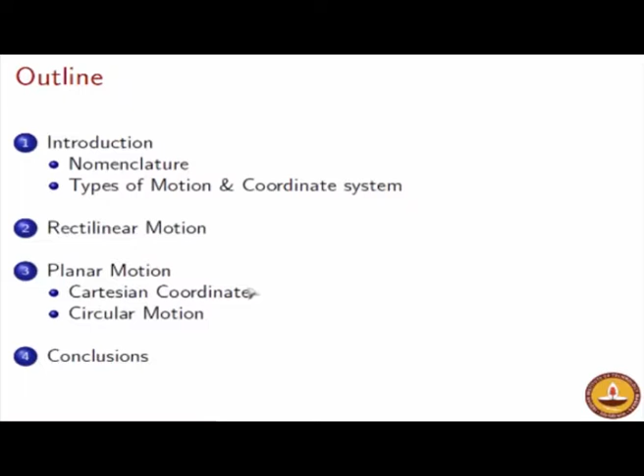are as follows. Today, we are mainly going to deal with this part of the course, which is clarifying a few words that we keep hearing in this subject. We're going to discuss mainly the nomenclature and set ourselves up by the discussion of different types of motion that we are going to analyze, and a very crucial aspect would be the different coordinate systems that will be used in the analysis. So let's go forward. These things will be covered in due course. Let's not waste much of today's time on it.

Fine. So here's an invitation to dynamics. Dynamics is a very foundational level subject. It is something which is all pervasive. It is ubiquitous. So there is hardly any application where you don't see the use of dynamics. Dynamics is there all around. So it's good if we could study this subject of dynamics with some effort in our foundational years, so that later in the applications we should not have any problem in dealing with this subject.

And the best thing about dynamics, unlike some other subjects, is that there are only very few rules to remember, and the purpose of this talk is probably to emphasize these very few simple rules. And the way I have been taught dynamics and the way I teach dynamics to my students is that we should not worry too much about the formula. The formula will come by itself, and also maybe in stark contrast to what some of you think, the way I think about this subject, it is not really a big deal to solve different problems by plugging values into a memorized formula. What is most important is understanding the rules of the game, understanding the concept, and then applying it to every situation.

I would rather discourage you to practice too many problems from routine books which are just going to use some formulas and how to use some formulas in particular problems. That is something which at least for me I think is not a very good idea. So going ahead, let's start with the course proper. So as we said, the topic that I am going to cover in this set of 5-hour lectures is particle kinematics. So I begin with the following description: what do these two words, namely particle and kinematics, mean? So I will spend some time in uncovering these ideas to you.

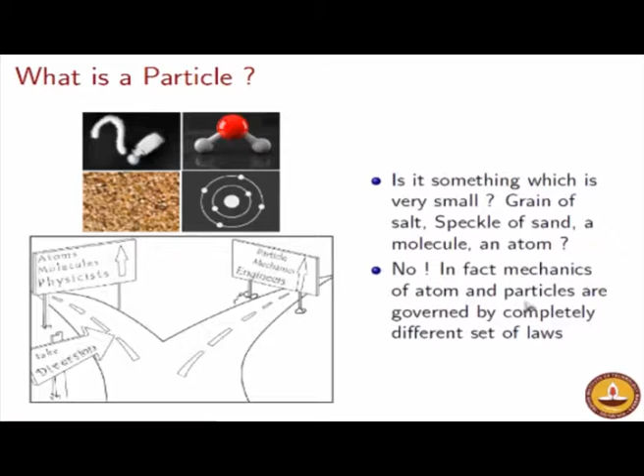So as I said, in engineering mechanics, what atoms and particles are governed by is not what we are looking forward to. In fact, atoms and molecules in general will be governed by a completely different set of rules which is beyond the ambit of engineering mechanics. In engineering mechanics, atoms and molecules are not the concern, but what we exactly mean by particles in the engineering context I will come to in the next slide.

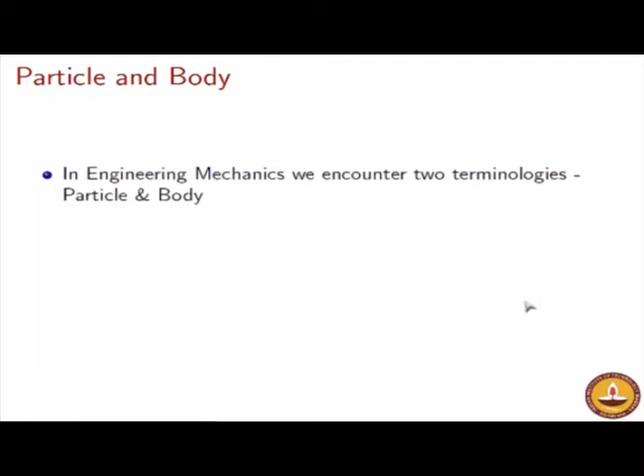So as we said, in engineering mechanics, that is the one which we are interested in, we encounter two terminologies, namely particle and body, and we are going to talk about particle mechanics at this point. So to define a particle or to characterize a particle, here is my simple definition of it. Particle is an object such that all points in the object have identical motion characteristics.

Let me illustrate what I mean. Let us take this object for example. This object, if it moves in this fashion, right, you could see my hand waving. So if this object is moving in this nice fashion, then all the points in this object, whether this one or that one, all the particles have identical motion characteristics.

Now that word motion characteristics is given in bold. What that means is that it has identical velocity at every point, it has identical acceleration at every point, it has identical displacement at every point in time. So this is a crucial distinguishing characteristic of what we call particle in engineering.

I will give you better examples downstream in my slides, but at this point I wish that you take a note of this very important definition of what is a particle as opposed to what is a body. Again, these two words refer to the very engineering context of their usage. So as I said, the motion characteristics, that word in bold that I have stressed, actually means the displacement, velocity and acceleration at each instant of time.

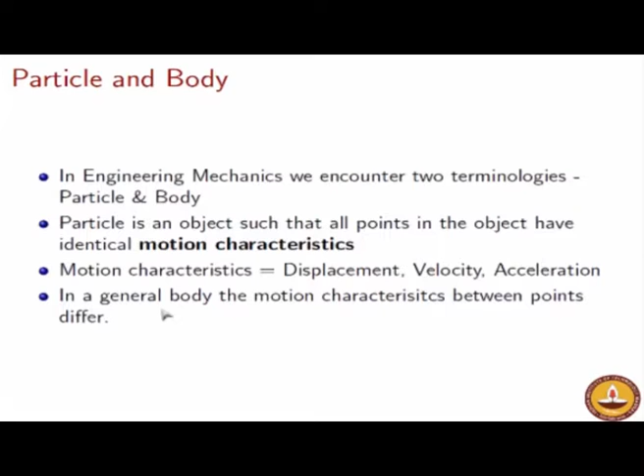So if the aeroplane is in fact flying in a nice smooth fashion without encountering any turbulence and the ride is very smooth, the crucial aspect is every point of the aeroplane, whether it is a living thing or a non-living thing like some point in the wing, some point in the tail, every point will have identical velocity. If the aeroplane accelerates, every point will have identical acceleration.

This will not be true if the aeroplane starts rolling in this fashion when it encounters turbulence and whatnot, or if it is maneuvering like a military aircraft, doing some strange sorts of maneuver, then it is not true that all points have the same velocity. But here we are talking about this flight vehicle going in a straight path, going in a path of ascent.

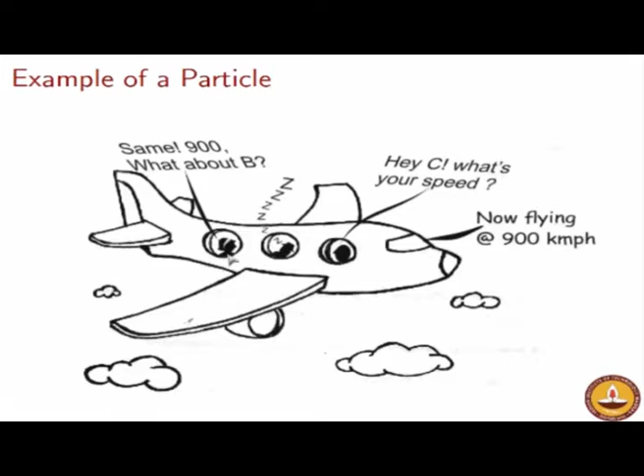And because we are interested in solving for the motion characteristics of any point, we call this a particle mechanics or a particle kinematics problem, where there is a single point which is of our interest. So just to recapitulate what we talked about in the previous slide, all points in the aeroplane, whether living or non-living, will have identical motion characteristics.

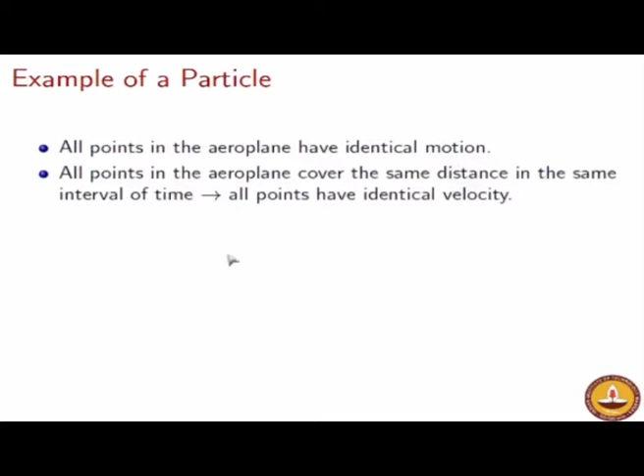That means that in the same interval of time, that is from takeoff to any other arbitrary point in time, all points will have identical velocity. During takeoff, the passengers, irrespective of where they are seated, will be experiencing the same kind of inertia forces. Again, that implies all points have identical acceleration.

This is true if the passengers remain seated, and if they start dancing around in the plane like most crazy people do, then this is not true. But we are talking about the ideal case where all the passengers are nicely seated, and the aeroplane is moving in a nice smooth fashion without any crazy maneuvers or turbulence as such.

So the last point is what allows us to idealize the motion of the aeroplane as that of a particle. So for determining the motion characteristics of the aeroplane, the study of the motion characteristics of any one point of this aeroplane is sufficient, the reason being that every point of the aeroplane shares the same motion characteristics. So whether you are interested in point A or point B, it does not matter.

So therefore, we will idealize this aeroplane to be a single point, and hence call this problem a problem of particle kinematics rather than rigid body kinematics. So to give you a counter example, let us first look at an animation. I hope you are able to see the animation.

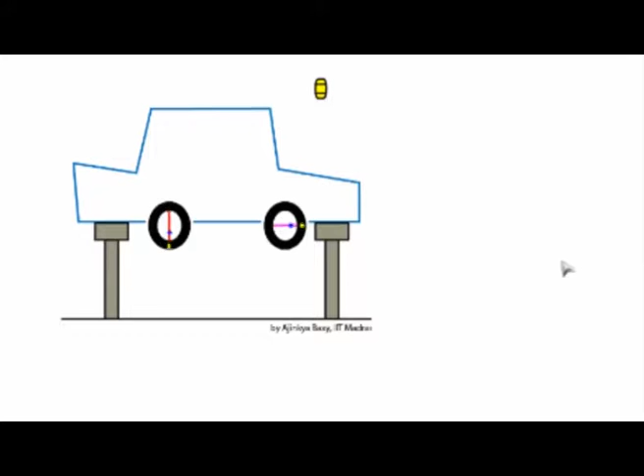Each point on this tire has a different direction of its tangent, and therefore the velocity at each point is very different. The velocity at each point has a different direction, even if the magnitude remains the same. So this is again in sharp contrast. We were able to see it whether you look in terms of magnitude or in terms of direction.

But in this case of a wheel which is simply spinning about its axis without moving, each point of this wheel has completely different velocity characteristics. Maybe I can draw. So what I intend to tell you is the following. So let us say this is the wheel

and this is the center of the wheel, and let us consider 2 points, one a circle and the other a diamond. At this instant of time, the circular point has velocity directed along this tangent, and at the same instant the diamond point has velocity directed along its tangent. So if I call this point A and this point B, VA is not equal to VB, because as I see from the drawing, the directions are definitely different.

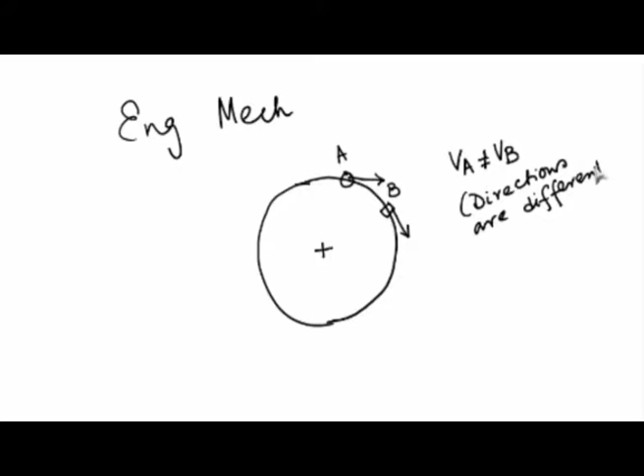So that is why this case is not conforming to particle kinematics. This body cannot be approximated as that of a particle, because we have understood that particle idealization can be made only for those kinds of objects where every point shares the same motion characteristics. And we have brought out to you 2 examples.

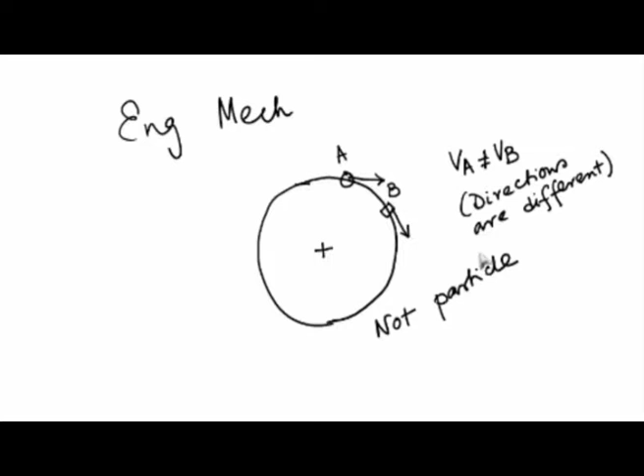One, the case of an aeroplane which is flying on a straight path. This corresponds to a particle because every point of the aeroplane shares the same motion characteristics, whereas in a spinning wheel, each point will have different motion characteristics and therefore it is not a particle. So please try to understand both the example as well as the counterexample. So I'll just run through what I have explained.

So consider the wheels of an automobile. When the car is taken for a wash, the wheels will rotate freely without touching the ground, as you would have seen in the animation. So during this free rotation of the car wheels, all points on the same radial distance will have the same magnitude of velocity, but the velocity will be directed in the tangential direction, and since at each point the tangential direction will be different, each point will have a different velocity, and therefore this is not the case of a particle.

So the wheel is not a particle, as we have mentioned. Okay, so this is a counterexample. To complicate things a little further, it is not just the wheel freely rotating while tied onto the car, and the car is not shown in the animation that you are seeing. This wheel is basically rolling without slipping on a frictional surface.

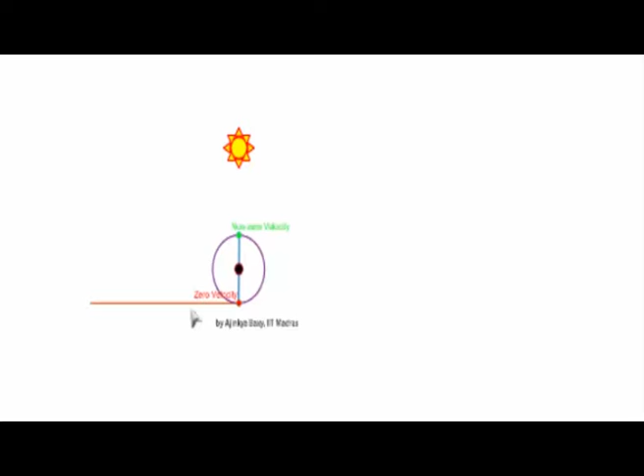What does that mean? That means, this is the wheel for you, and when this wheel is rotating, you will see that the point of contact between the wheel and the ground is always subjected to a condition which is called the zero velocity condition. That makes sense because when you say that there is adequate friction between the wheel and the ground, then the point of contact should not slip. Relative motion between the wheel and the ground is completely prevented because of the heavy friction between the wheel and the ground.

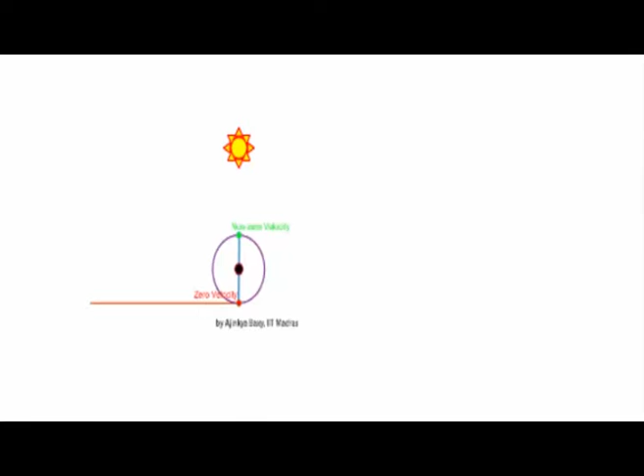So at any instant of time, this red point will have a zero velocity, whereas all other points will have a non-zero velocity. In fact, by further analysis you can show that the velocities will again be along the tangent to this circle, but the direction of the tangent is again different. So here you will find that the velocity is again different for different points on the wheel. So this time we can say that not only the direction but also the magnitude of velocity of all these different points on the rim of the wheel is going to be different.

So we have to conclude that this rolling without slipping of a wheel again constitutes an example wherein not all the points on the wheel have identical motion characteristics. Different points in the wheel have different motion characteristics at each instant of time. So therefore, though the wheel is much smaller, the aeroplane can be idealized as a particle, whereas the wheel cannot be idealized as a particle.

So the crucial takeaway: please don't have a feeling that a particle is an idealistic assumption that never occurs in reality. It is not so. It is just the way that you wish to analyze the kinematics of a given system. A very large object can be idealized as a particle, whereas even a small object may not admit the particle idealization. So the particle idealization actually has nothing to do with the size of the object. It has to do with the type of motion that you wish to analyze.

If you are indeed sure that your aeroplane or your car is traveling on a straight path, there is no reason to think that it is not a particle. Similarly, even a small wheel, if it is just moving in a translatory fashion, is a particle. But if the wheel is actually rolling without slipping on a surface, or even if it is freely rotating, then it is not a particle.

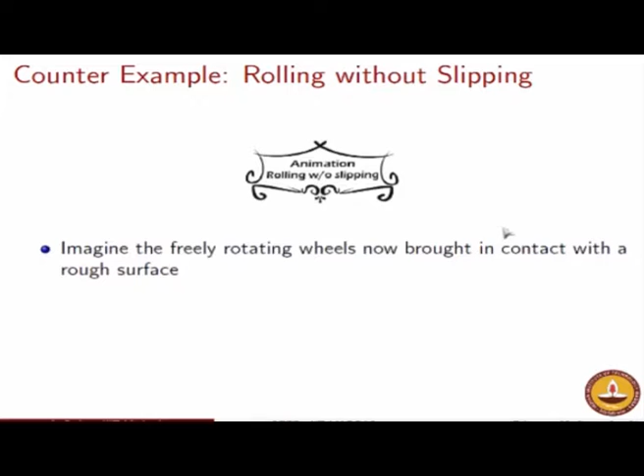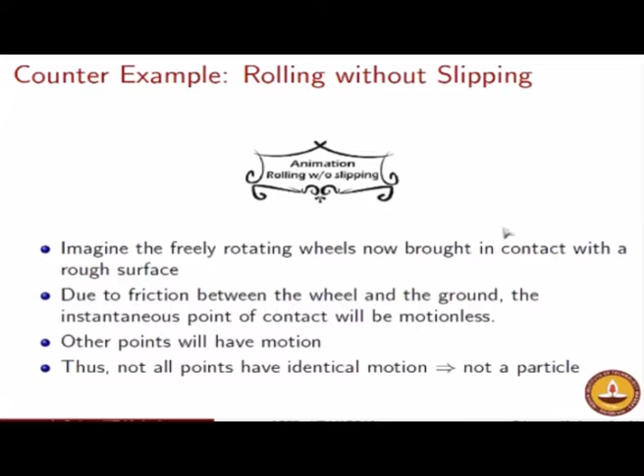So this distinction I think is very important, because you must understand when to apply the rules of particle kinematics and particle dynamics to a given problem, and when not to apply them to the problem at hand. So with this in mind, let us go forward. So as I said, these additional points are just what we have talked about in the last few minutes.

Now coming back to this motion of a rigid body. You will keep hearing in the course of your engineering curriculum the usage of these two words, rigid body and deformable body. It is very crucial to understand the distinction between these two terminologies. A rigid body is a sort of idealization, but let us try to understand how a rigid body differs from a deformable body.

If the distance between any pair of points remains unchanged during the course of motion of the body, then the body is said to be rigid. To give you an example, I draw 2 points on this rigid body, one here and one here. As this body is moving, I don't think you will dispute with me that the distance between these 2 points is not changing. So I can idealize the motion of this body.

If I extend this argument to an aeroplane, the distance between 2 points marked on an aeroplane is not going to change as the aeroplane is flying. The distance between 2 points drawn on the body of your car is not going to change because of the motion of your car. So in all these cases we call this a rigid body. A rigid body is a body wherein the distance between any pair of points remains constant and does not change during the course of your analysis.

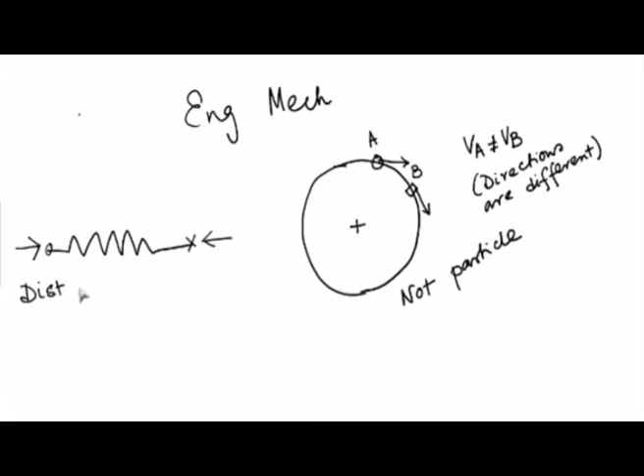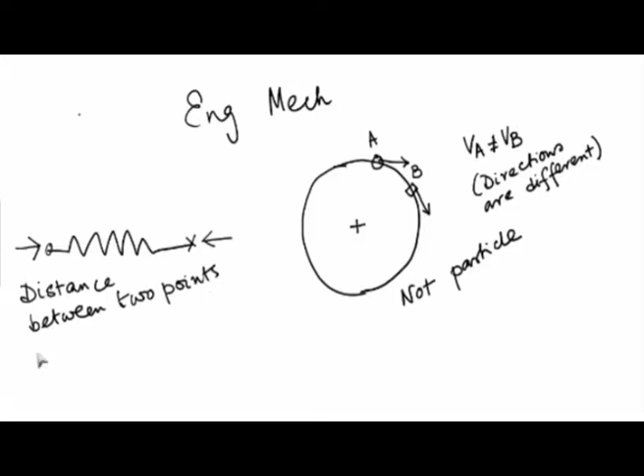This is in contrast to a deformable body, where the distance actually changes. If you have a spring-like object, I can draw a spring for you. So let us say this is a spring. Under the application of forces, the distance between these 2 points will obviously change. So the distance between 2 points in a spring changes due to application of forces.

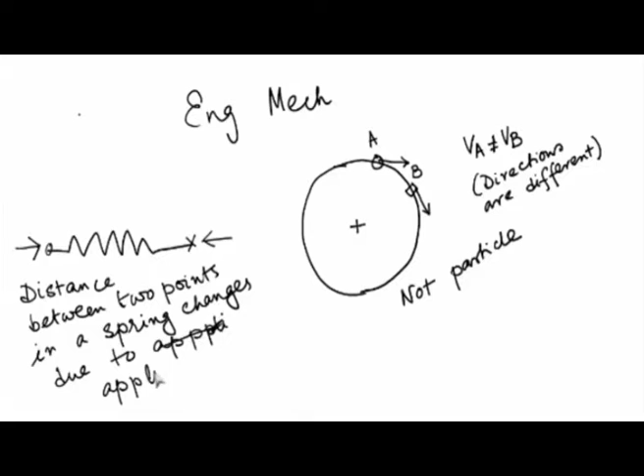Similarly, if you consider an elastic bar, as you will see in your lab experiments in solid mechanics, once you apply equal and opposite forces on this elastic bar, it will be deformed, which means the distance between any pair of points is not going to remain the same, and that is when we call this bar elastic. There will be situations where the distance between 2 points in the body you are analyzing is not going to remain fixed, and that will be the case of an elastic body, whereas where the distance is fixed it is a rigid body.

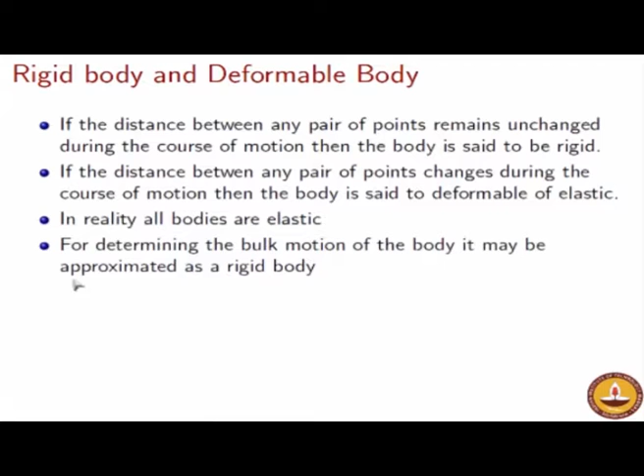Going ahead, in reality all bodies are elastic, as you will learn in your strength of materials. But the important part is that for determining the bulk motion characteristics of the body it may be approximated as a rigid body. As I just demonstrated, while analyzing these motion characteristics the distance between any 2 points can be assumed to remain the same, but I can apply a large amount of force on this body and actually crush it, making these 2 points come close together.

But in the cases we are going to deal with right now, we are not talking about such cases. We are only going to talk about the bulk motion characteristics of this kind, and that is what is going to be of our interest in the next few hours.

And to continue my example with wheels, a hard-pumped bicycle tire will approximate the rigid condition. If your bicycle tire is pumped hard and you press it, it is very difficult to squeeze the tire tube, which means the distance between the 2 points is very difficult to change. At the other extreme, when the air in your bicycle tire has leaked out, it is very easy to squeeze, which means under that condition the bicycle tire is becoming more and more elastic.

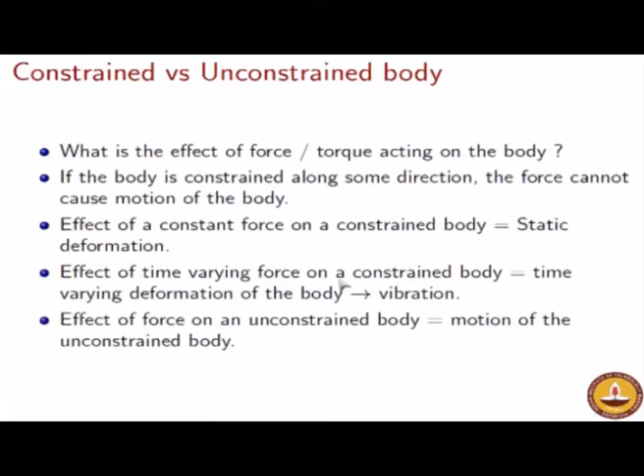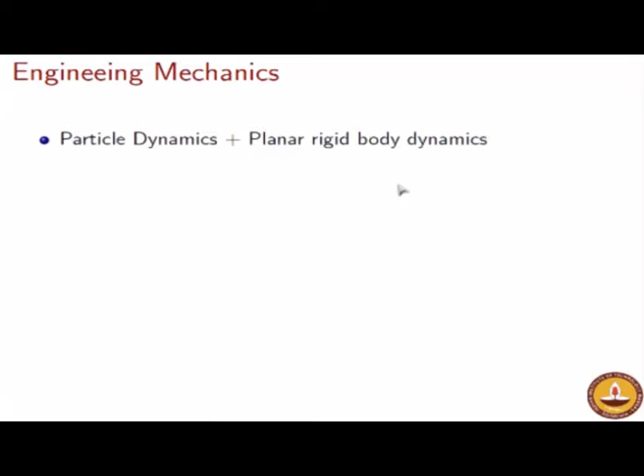So you are going to study throughout the course of a semester probably entire particle dynamics and rigid body dynamics, which is planar rigid body dynamics. However, the part that I am going to teach you is only the particle kinematics part. So the present lecture content will be about particle kinematics, and the objective of an engineering mechanics course would be to be able to predict the motion characteristics under the action of forces.

As engineers, it is very crucial to understand that any engineering component will be under the action of forces. Now these components can either be constrained or unconstrained. In case it is constrained, the effect of forces acting on these components will cause deformation, stress, strain, and if the stresses and strains are within acceptable limits, they will not fail, else they would. For the other extreme, when these bodies are unconstrained, the effect of forces will be to cause bulk motion of the body as dictated by Newton's second law.

So as engineers, you have to predict what is the effect of force either on a constrained body or on an unconstrained body. In an engineering mechanics course, our topic of interest is the effect of force on an unconstrained body, a body which is allowed to move. And for such bodies, as we just said, we are going to have a bulk motion characteristic. The body in totality is going to move, either like an aeroplane or like the freewheeling animation that we just saw. So it is very important for you to predict either kind of motion. Through engineering mechanics you are going to predict these kinds of motions given the forces.

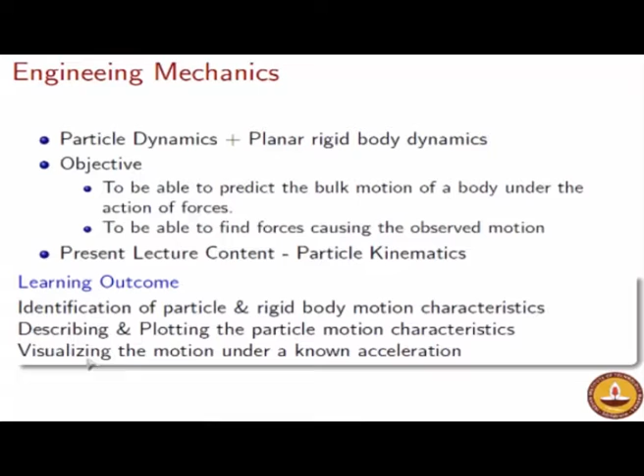So with this introduction, I think we will make a more formal beginning, and just like we elucidated to you the meaning of particle, in this slide I would like to elucidate to you the meaning of the word kinematics. The word kinematics, though it sounds heavy, is actually a very simple concept. We have to describe the motion characteristics. Now you may say, what do I mean by describing?

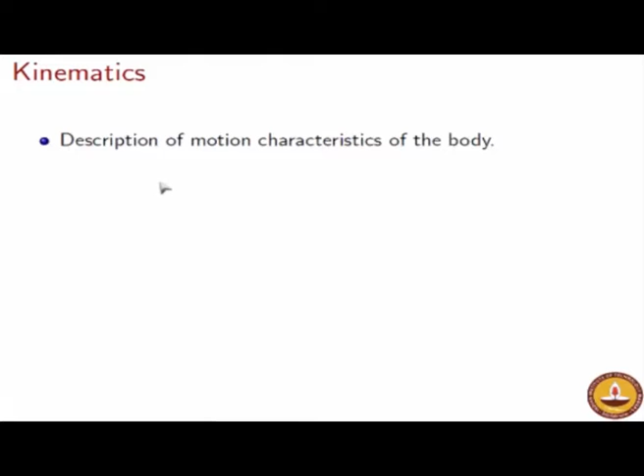Can I describe someone? A naive, simplistic idea could be that, let us say my body of interest is a train this time as opposed to a plane in the first slide. So a description of the motion characteristics of a train, let us say the Mumbai Delhi Rajdhani Express, could be just its timetable. It leaves Bandra Central at 4 o'clock in the evening, it reaches Surat at 8 o'clock in the night, it goes to Delhi at probably 12 in the noon.

So that is the description of motion characteristics, but that is a layman's description, not a description that is desirable from an engineer, because what is it that it lacks? This description that I have just given you in terms of its timetable lacks the information of what happens between two stations.

You have said that it leaves Bandra at 4 o'clock in the evening, if I am not wrong, and reaches Surat at 8 o'clock in the night, but what happens between Bandra and Surat is not known in the timetable information. Whether the train runs fast, whether the train runs dead slow, whether the train is accelerating or decelerating, nothing is known about it. So such a naive description is not suitable for engineering purposes. We want a description which is more complete.

So given any 2 points, whether in time or any 2 points on the train track, we should be able to completely describe its motion characteristics. And what do I mean by motion characteristics? 3 things: displacement, velocity, acceleration. Any time you tell me what happens at 8:15 in the night, I should be able, from the description, to tell you that at 8:15 it is at such and such place, or it is moving at such and such velocity, or with such and such acceleration.

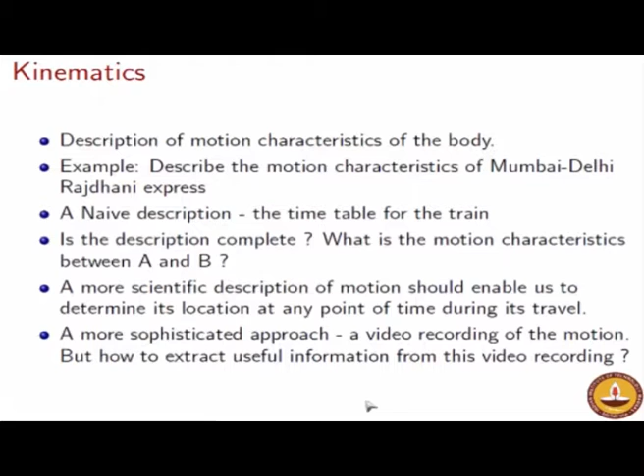So therefore it is sufficient to look at just one point of the body and determine its motion characteristics. Whatever motion characteristics you determine for a certain point will be true for every other point. So the objective of kinematic analysis will be to determine a mathematical function to determine the position of the particle at every time instant.

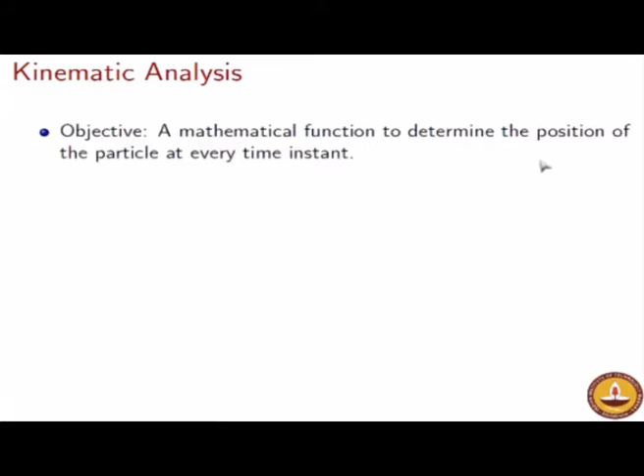And it will be shown to you that once you determine a mathematical function which gives the position at every instant of time, the velocity and acceleration can be determined from such a mathematical function. So therefore we will in fact have a complete description of motion characteristics once a mathematical function for position against time is obtained. That is the purpose, as I will elucidate to you.

So kinematics is therefore the study of the geometric character of the motion, namely position, velocity and acceleration, which is what I have been emphasizing again and again. And what I will try and convince you through the course of these next few hours is that a graphical presentation of such motion characteristics is actually very informative. All the information that is carried by the formula can be very nicely represented in a graph,

and the best thing is that you can plot such a graph using just a simple piece of software such as MS Excel, or better still MATLAB or Mathematica or whatever. So we will have some exercises for you wherein you will actually plot these graphs given the functions, and also the reverse, given the graphs determine the functions. Either way, it's going to be a very interesting study.

The part that is not in the purview of kinematics is the forces. We will actually not link the forces with these motion characteristics. Kinematics is the study of motion in the absence of forces, but kinematics will get linked to the forces in the next part of the course, which is called kinetics, and together they form the subject matter of dynamics. So in kinematics we are not going to talk of any forces which are causing this motion.

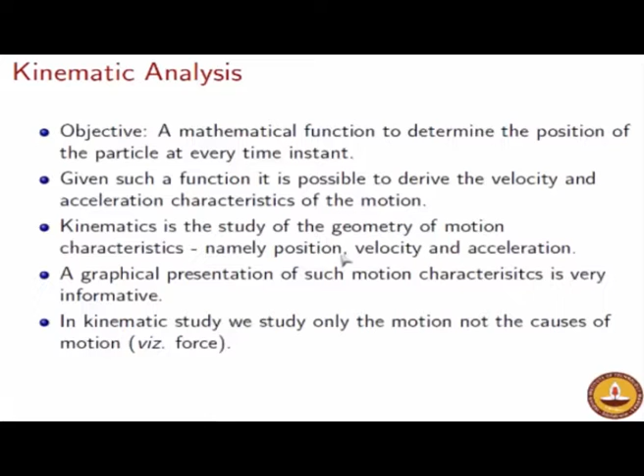In kinematics we are only going to say that we wish to describe the motion characteristics either through a formula or through a graph, right. But once the formula is determined for position, how to determine the additional information regarding velocity, acceleration and whatever is what we are going to deal with in the next few hours.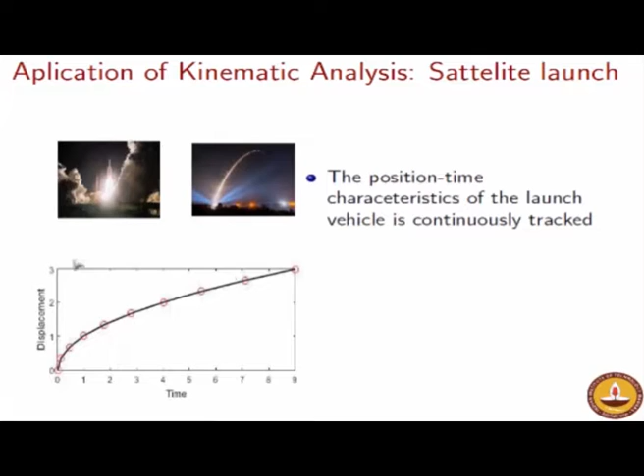So this sort of information is what we are looking at, and it will be taught to you how, from this displacement time characteristics, you can recover additional information like velocity and acceleration if you want to. And this is very important, at least for the satellite application that we are talking of, because the success or failure of putting the satellite at the desired location depends on these motion characteristics.

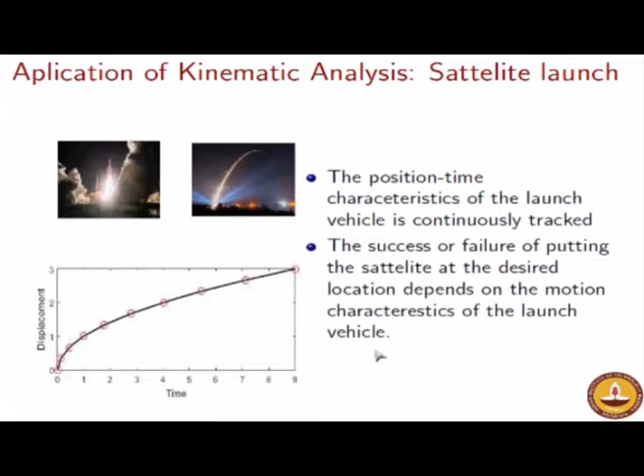As you observe this plot, you should be able to predict whether the launch will be successful or a failure. So determining this sort of plot, whether through just video imaging or through a mathematical function, is extremely crucial for this sort of an application, and this is just an example. In very many different cases, this plot is going to play a very crucial role in many downstream applications.

Okay, before we move further, I will throw myself open to any questions at this point, because now we are getting into the heart of the subject. If you have any questions, please shoot them. I'll take a 5 minute pause to take your questions at this point.

PSGCT has asked me a question: what is the difference between kinetics and dynamics? Actually, the subject of dynamics has two parts: kinematics and kinetics. Kinematics is the study of the geometry of motion, where you don't pay any attention to the forces which have caused this motion. That's the part we are going to cover in the present module of 5 lectures. So kinematics is about the description of motion. Relating the motion to the forces is kinetics, and kinematics and kinetics together comprise dynamics.

I hope that answer is clarified. PSGCT, could you please respond with a yes or no? KSRCT, you wanted to ask some questions?

Sir, I have one doubt. Yes, please. Rotating wheel. Sorry? The wheel is rolling, without slipping. How can we assume that motion, whether it is not a particle or it is assumed as a particle? I got your question. Let me repeat your question.

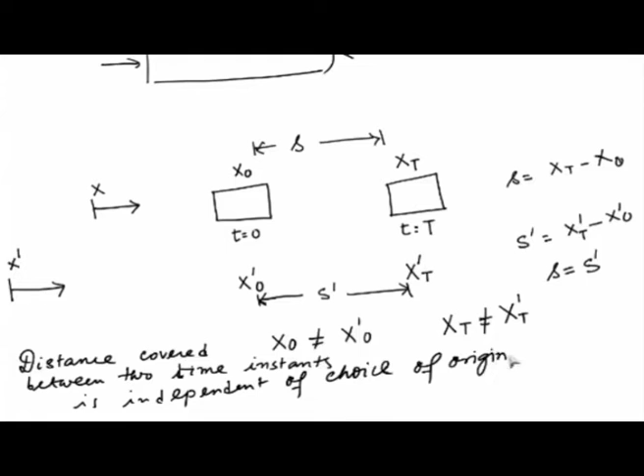So the distance covered between two time instants is independent of choice of origin, okay. So this will come in handy as we try to find the velocity, okay.

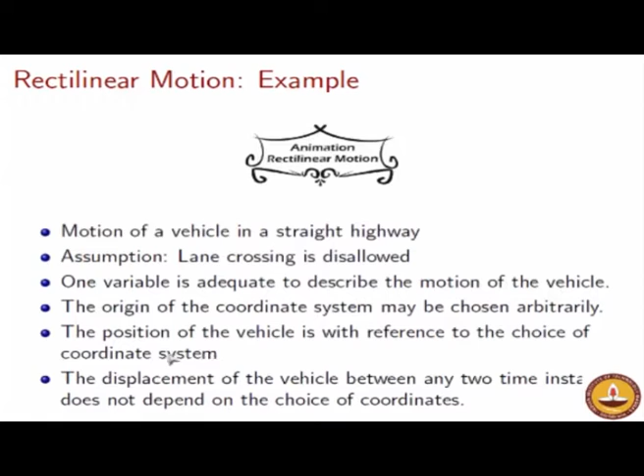So the origin was chosen arbitrarily, the position definitely is with reference to the choice of coordinate system; different choices of coordinate system will lead to different positions of the vehicle being determined. But this is crucial: the displacement of the vehicle between any two time instants does not depend on the choice of coordinate system. Wherever you choose your coordinate system, the distance between two points in time will not be subjected to this subjectivity as to where you put the origin, and this is what we call rectilinear motion.

So after giving you the example, let us now try to generalize and find out the general characteristics of this kind of motion, which we will call rectilinear motion. Firstly, the stark distinguishing characteristic is that it is always happening in a straight path. The motion of the body, now idealized as a particle, happens only along a straight path, and the position can be described by using only one variable, namely x.

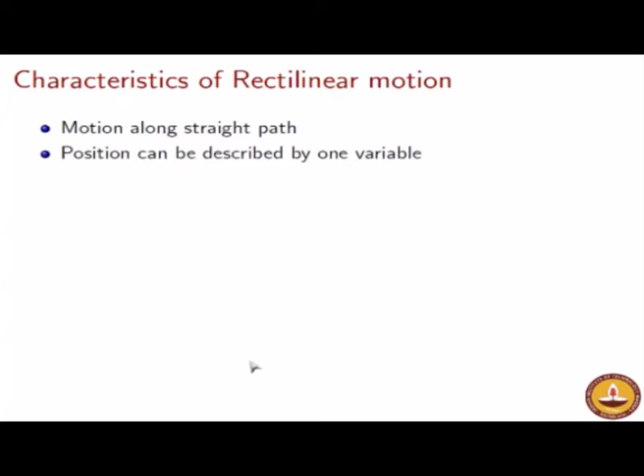There is no point in a description where you have the motion in terms of x and y and z. There is no reason to choose a two-dimensional or three-dimensional coordinate system in the description of rectilinear motion. Another interesting characteristic, as you see in this animation: not only is the position along one direction, the velocity is also along this direction. There is only one direction of interest. The position, velocity, acceleration all have the same direction for all times.

This is really a very marvelous idealization. As we will see, this rarely occurs, but it is not too far-fetched to think that within some time intervals on expressways and highways, this sort of motion does take place. So in this case, definitely it is rectilinear motion. This may be a tourist bus, and such tourist buses do in fact go straight without overtaking and so on.

So the important factor is that as long as it is moving on the straight highway, the velocity magnitude can change, but the direction of velocity is always along this, because there is no way it can change its direction. Lane crossing is disallowed, and people do abide by such rules. Then we have a case of rectilinear motion. Similarly, since the velocity always remains in this direction, even though its magnitude changes, the magnitude of acceleration also changes, but the direction of acceleration or velocity always remains the same.

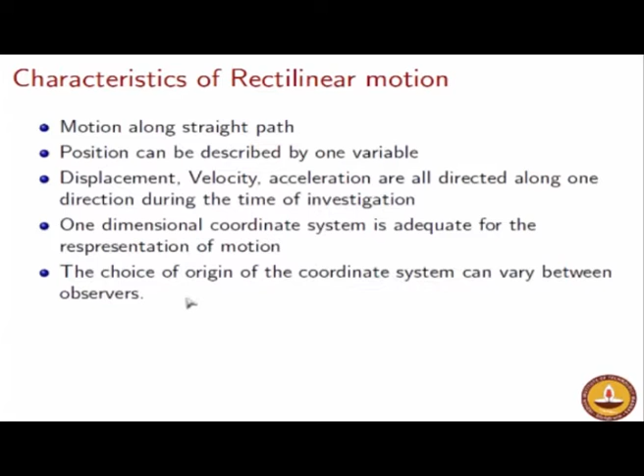So accordingly, the physical interpretation of the coordinate as the distance from the origin varies between observers. The position will vary, but displacement between two time instants is independent of the choice of origin, as I have just written down in the OneNote also.

If I have to determine the position of this car, I cannot describe it with only one variable. It is quite non-intuitive to think that you will be able to do so, and this time lane crossing is also allowed. So there is no way in which I can describe this car motion with only one variable. I need two of them, one to describe how much left or right it is from a choice of origin, and how much top or bottom it is from a choice of origin. But again here the same question arises that the origin can be at different places.

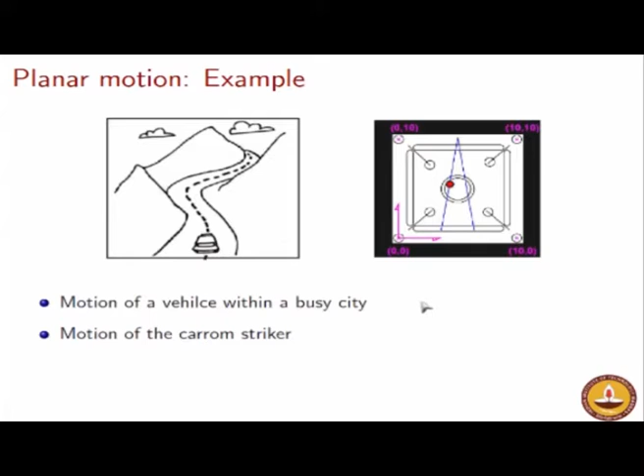Okay, and a better example that we have concocted is that of the motion of a carom, and I think we have an animation. Yeah, so here you see, as you play caroms in your hostels, this is the red coin which is moving through. Now, to describe this motion, you cannot describe the motion of this red coin with a single variable x, because it is moving leftwards and it is also moving from top to bottom.

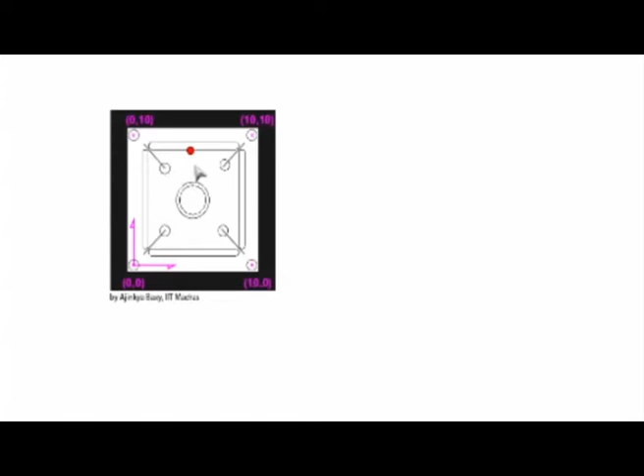So if this is the particle of your interest, we call it a particle despite it being a body of reasonably large size, maybe half an inch or so, because it has identical motion characteristics at each point. All that we need to understand is the motion of any one point, and that is sufficient. That was just a repetition, but in contrast to rectilinear motion, this is not a rectilinear motion. Why? Because to describe the motion characteristics of this carom coin, we need two variables as opposed to a single variable required in rectilinear motion.

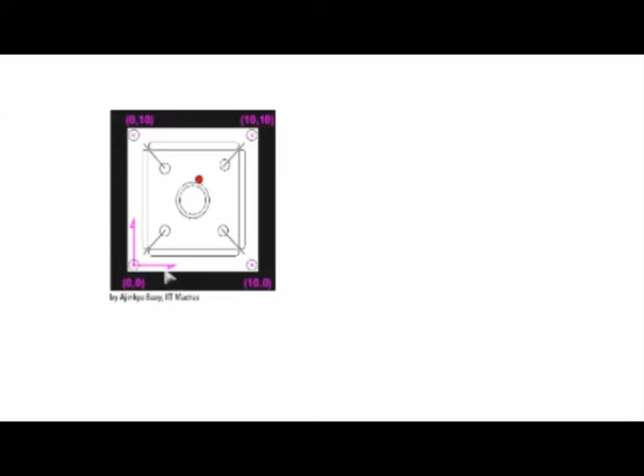And why is it that we cannot describe it with one variable? Because it has both motion from left to right as well as motion from bottom to top, and after hitting this edge, it travels in the negative y direction. So it is more appropriate to choose an xy coordinate system for the description of motion. To describe the motion characteristics of this carom coin, we wish to find x of t and y of t. Both x of t and y of t need to be determined.

You cannot just say that I will determine only x of t. If the carom coin was moving only in this direction, then you can say it is x of t only. But since the carom coin has a motion of this kind, to describe its motion within the entire period of the game, you need both x of t as well as y of t. So the first takeaway is that the motion of this red coin is not describable through rectilinear motion characteristics. This is necessarily planar motion, and for the description of planar motion we need at least two variables, in this case, what seems very appropriate at this stage, x and y.

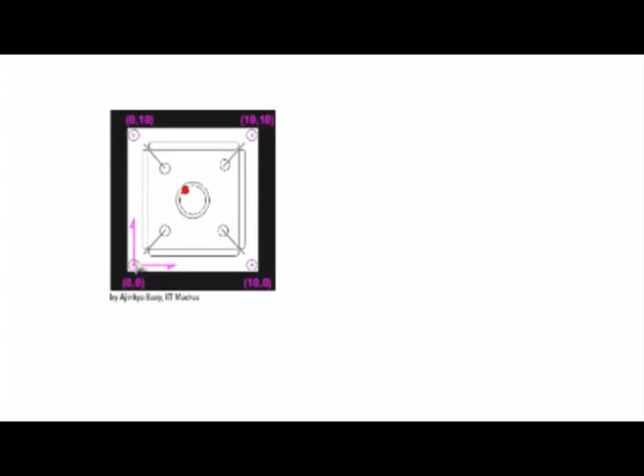But again, similar to rectilinear motion, we find that there is absolutely nothing binding us to choose this coordinate system with origin here. We could choose a coordinate system with origin here, we could choose a coordinate system with origin here, or anywhere else you want to. It can be even outside the carom board. There is no need that it has to be this. This argument is just similar to the rectilinear motion argument, that the choice of origin of the coordinate system is left to the individual analyst.

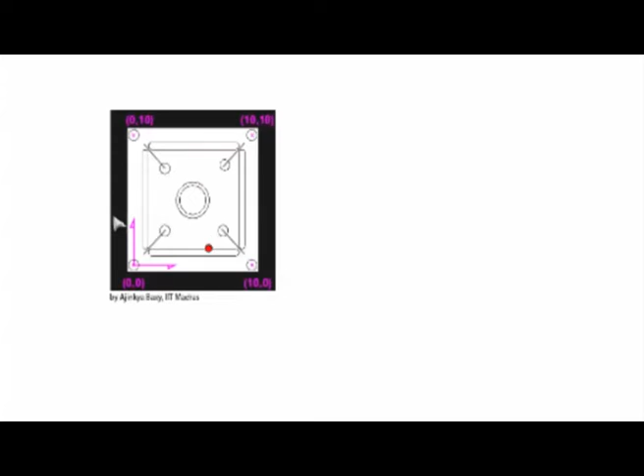But as we will see, despite this freedom given to the analyst, the velocity and acceleration characteristics reported between different analyses will not change. So I hope you get the point as to what is the difference between rectilinear motion and planar motion through these two examples. The important point is to describe the motion characteristics we need two coordinates in planar motion as opposed to rectilinear motion.

Now in the carom case we have seen that xy is the obvious choice, but we will bring out more examples with varying levels of difficulty, wherein we will see that probably not the xy system but maybe an r theta system is better. So it could even be a non-Cartesian system, but at this stage I would not like to complicate that far. I would simply like to state that two coordinates are necessary for description of planar motion, and by similar analogy we will do spatial motion also, where we will see three variables are required for a complete description of motion.

So as we said, for the carom striker we need to describe the motion with two variables, and what seems to be appropriate is the xy system. And here we have just taken an example where the carom board is of size 10, maybe you can call it 10 inch. So for a 10 inch by 10 inch carom board, we have just elucidated an example where the origin is selected here, and with this as the origin we are trying to find out x as a function of time and y as a function of time of this red coin, and that will serve as a kinematic description, or what we keep calling motion characteristics.

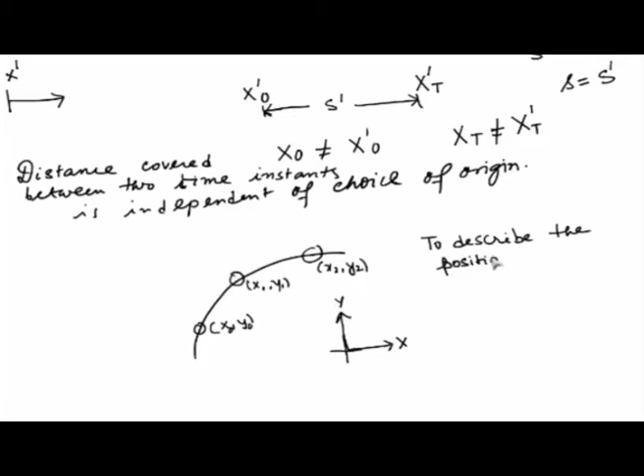Okay, there is nothing wrong actually with this description, where you are trying to describe the motion of the car as it is going on a circular track through two variables x and y, where x and y could be centered at the origin if you want. This is the x and y coordinate system, and to describe the position of the car, x comma y may be reported at every time, for every time.

But then a smart analyst will be able to realize that reporting x and y is actually redundant. If you report x, y is obvious, because at each instant of time you have, so to say, this equation to be satisfied. So at each t you must have x square plus y square equals r square. So even if I give x0, x1 and x2, you should be able to recover y0, y1 and y2

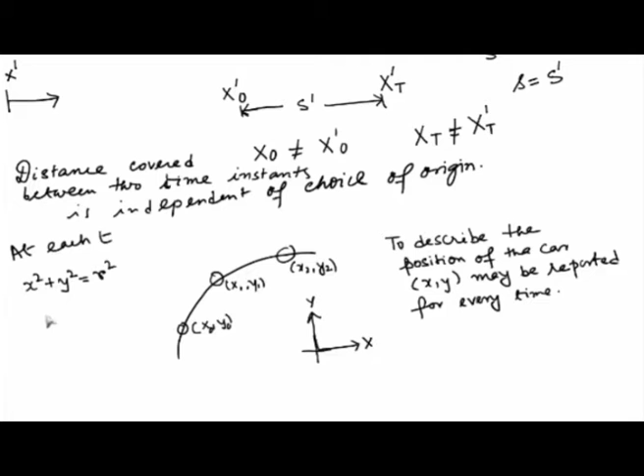through this relation. So therefore, though it appears to be a planar motion, using an xy system for this case is actually not the best choice. The best choice is a choice which allows you to describe this problem with the least number of variables. Why unnecessarily make life complicated by introducing two symbols x and y when you know that there is no need for describing it through two symbols, because the two variables x and y are interrelated.

So we will try to get some simplification by trying to eliminate one of these variables, which is precisely what a cylindrical coordinate system will let us do. But at this point I wish to emphasize that though this is a planar motion, it is not well suited to a description in terms of Cartesian coordinates x and y. The better choice would be to describe it through this angular variable theta.

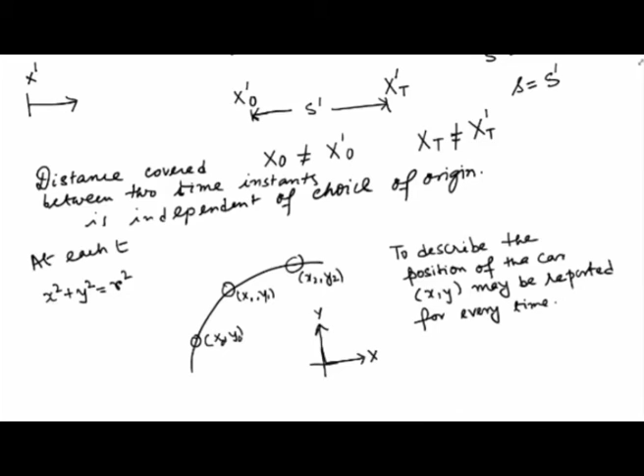So instead of describing the problem through x and y, this is the circular track. Instead of describing x and y against time, I might choose to describe theta against time, where theta is measured in this fashion. So a better description of motion which avoids any redundancy is theta against time. Let me repeat my argument once again.

This was the case of a car moving on a circular track. Now obviously one might think that to describe the motion of the car moving on this circular track, it is not proper to describe it in terms of one variable x. You would like to describe it in terms of two variables x and y. So an analyst with a simplistic viewpoint thinks that it could be represented as x against t and y against t, two functions he wishes to derive.

But then a sharp fellow comes in and says, why are you describing in terms of two variables? Because if you describe one of them, x, then the other variable is automatically determinable, because at each instant x square plus y square has to be equal to r square. So therefore there is no need to do an analysis for both x and y.

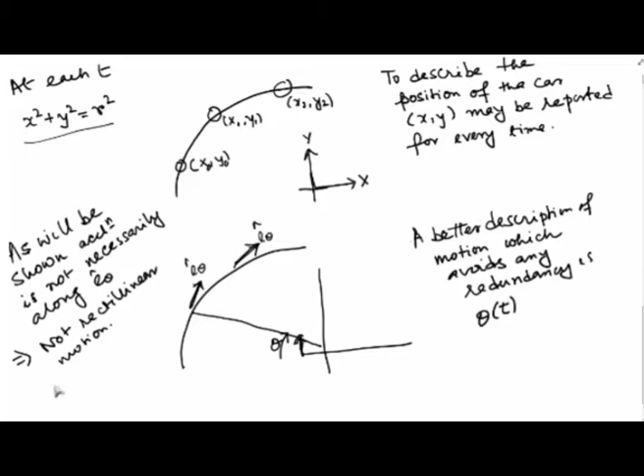At present, I hope I am able to convince you that despite this kinematic description being possible with the choice of only one variable, it is not satisfying all the characteristics of rectilinear motion simply because the acceleration is not always along the same direction. Okay. So, with that, let us return to the lecture material.

So, this is the question that I had left open in the presentation slide. So, is this motion rectilinear or planar? Despite being describable by a single variable theta, it is not rectilinear, it remains planar, but it is just that even planar motion can be represented by a single variable. It is not required that planar motion has to be represented by two variables, that is not a requirement.

As you have seen in this case, a planar motion can be represented by one variable, but it is just that for description of this velocity and acceleration, you require two directions. You can't do it with one direction as we have just shown you. So, velocity at any instant is along E theta and acceleration is not along E theta, that is the argument which I have just given. So, formal proofs of this we will do in due course as we go along.

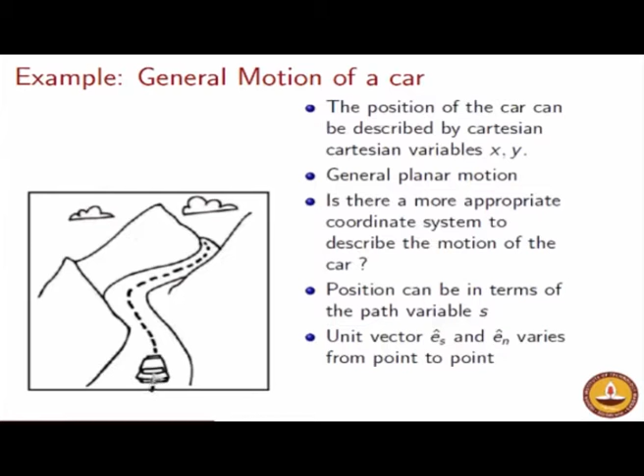So, again we can say the position of the car can be described in Cartesian coordinates as xy, in which case it is obviously understood that it is a general planar motion. But then, as hopefully by the end of this course you will understand, a more appropriate coordinate system is not the xy global coordinate system, but a coordinate system along the direction of this curve. That may sound a little bit non-intuitive, but hopefully we will be able to show that to you.

So, what we mean is that you could put a coordinate system along the track of this car, just like we have put a coordinate system on the circular track for you. Yeah. So, this is the coordinate system along the circular track. And this was easy to visualize because this is circular. So, at each point you know what is the tangent, and this cylindrical coordinate system is basically such that at each point this tangent is your vector of interest. Now,

coming back to this general case, here you could put a coordinate system, not necessarily the xy coordinate system, but work with a coordinate system which I call an S coordinate system or a path coordinate system along this path. So, at each instant of time the tangent to the path is S, and then you pick another direction which is perpendicular to S and directed towards its center of curvature, and that is called N.

But anyway, at this point I do not wish to get into much rigorous detail of this problem, but all that I wish to emphasize is that even in a planar problem, as in the case of the carom board problem, it was quite obvious that you need a coordinate system which has x and y, because finally the carom board moves like this. We said that the orientation of this coordinate system is left free for the choice of the analyst. Similarly, the origin of the coordinate system is left free for the analyst, but that is not the only choice. That is the point that I wish to drive home.

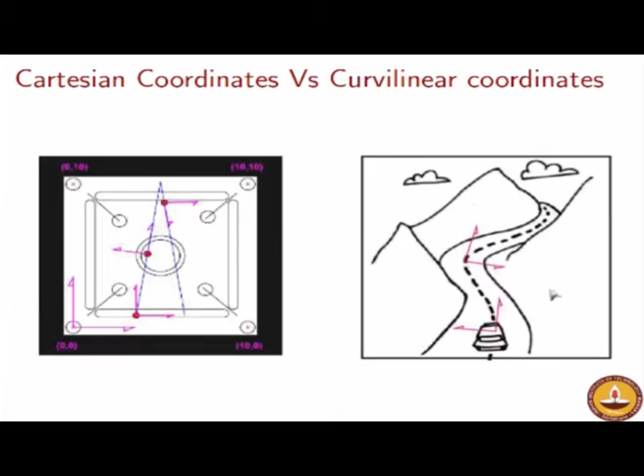Okay. So, now instead of introduction, we will actually begin our study of the simplest type of motion, which is rectilinear motion, and by now you know the terminologies, what is a rectilinear motion, and therefore we are all set for the description. So, we are now going to analyze the rectilinear motion. As we said, the simplest example of a rectilinear motion is that of a motion of a car which is along a straight line or a highway and lane crossing is disallowed.

So, as we argued at length, the position of the car can be best described with reference to a one dimensional coordinate system, and obviously it is going to be Cartesian. For one dimensional, there is absolutely no ambiguity. There is nothing like a cylindrical one dimensional system or spherical one dimensional system. If it is a one dimensional system, the only possible choice is obviously Cartesian. So, this Cartesian with a question is just left to confuse you. It has to be Cartesian, it cannot be anything else.

But the only issue is that the origin can be selected arbitrarily. Whatever be the choice of analyst, the origin can shift between the two analysts. So, at any time x(t) will denote the position of the particle, which is the displacement with reference to the origin. Now, between two times t1 and t2, the particle is at x1, which is x at t1, and x2 at t2.

So, this is the relationship between displacement and time, and either it can be a mathematical function or a graphical plot, and we will try and emphasize both to you, how to recover a graphical plot out of a mathematical function and how to determine a mathematical function intuitively from a graphical plot. So, what we mean to say is, let us say x(t) is 5t.

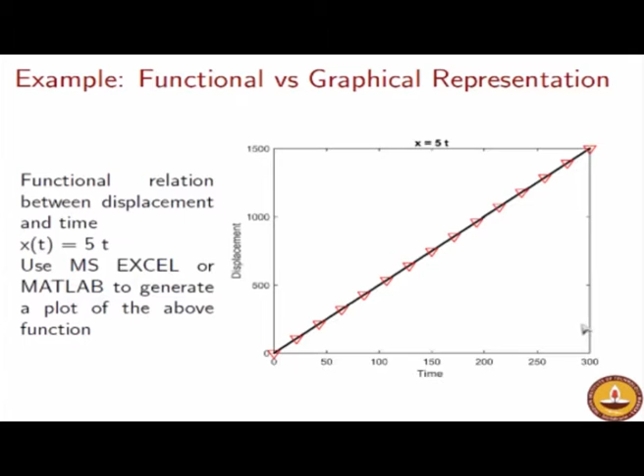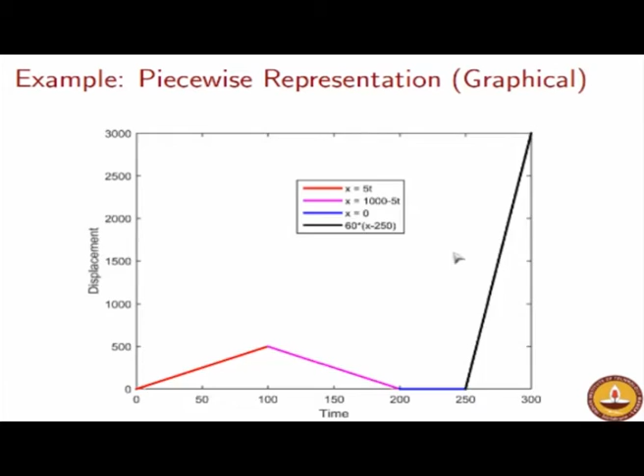It is not possible to give a single functional relationship for the entire period t equals 0 to 250 or more in this case, and that is why in the time segment 0 to 100 you have one functional relationship, in the next 100 second period you have another functional relationship, in the next 50 seconds you have another functional relationship. So this is called the piecewise representation, and this is the functional form of it, and this is the graphical form of it.

So I would like to sort of conclude here, because maybe tomorrow we will start looking at velocity and accelerations also, and how to derive velocity and accelerations, where we will actually start the formal mathematical calculations for the other things such as velocity and acceleration.

But when you go back home today, please try and practice how to graph different functions. You must by now be exposed to different kinds of functions. You would have seen different functions in your high school, in your first semester of your curriculum or even now. So whatever be the functional form, let's say cos t, sin t, e to the power t, and different polynomial functions like t plus t squared. The homework that I will leave you with for today is that you should be able to practice how to graph different functions of the kind that I have shown you.

If you have access to a scientific computation software such as Maple or MATLAB or Mathematica, it will be very good. But even otherwise, I am quite sure in these days of smartphone technology, everyone carries MS Excel in his pocket. You could either use Microsoft Excel or such similar softwares. But whatever be the software of your choice, please practice how to plot different figures from a given functional relationship. This is extremely crucial and it will serve you a great deal if you can learn this technique well.

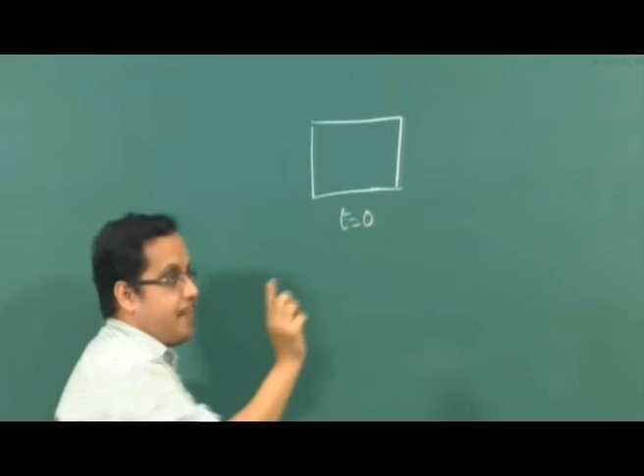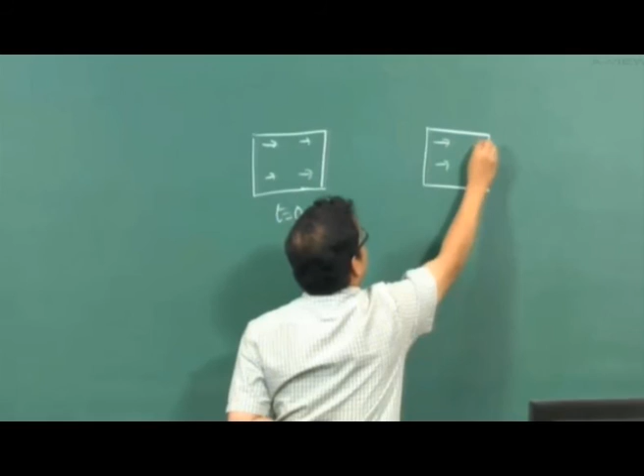Rectilinear motion means it is a particle motion. All points will have the same motion characteristics, but in curvilinear motion we get to see the fact that the direction... I think I will quickly draw it on the board once more just to complete things. So in rectilinear motion you will have a body here at t equals 0. Since it is a particle, all points have the same velocity, and at a later point also all points have the same velocity, but the magnitude of velocity could be different. This may be small, this may be large, but all points are the same. So VA, VB, always VA equals VB at a later time.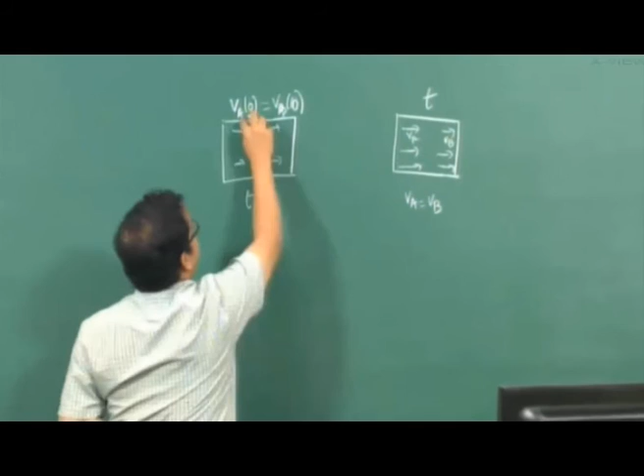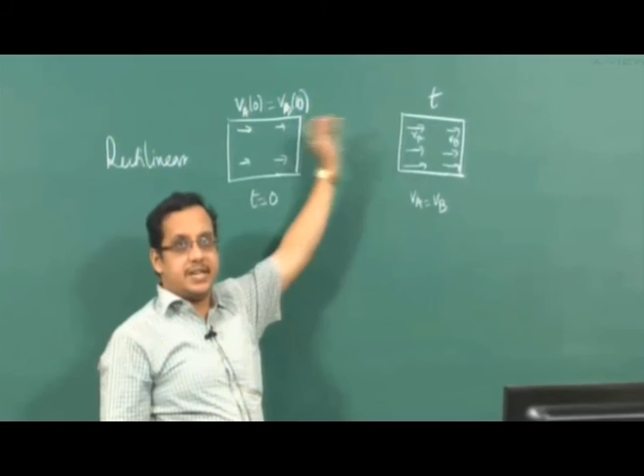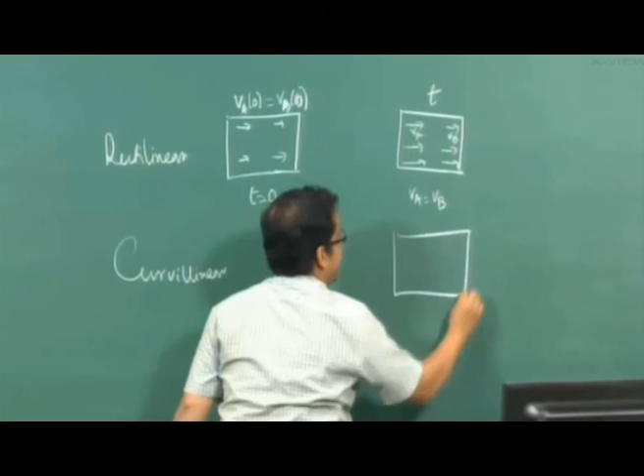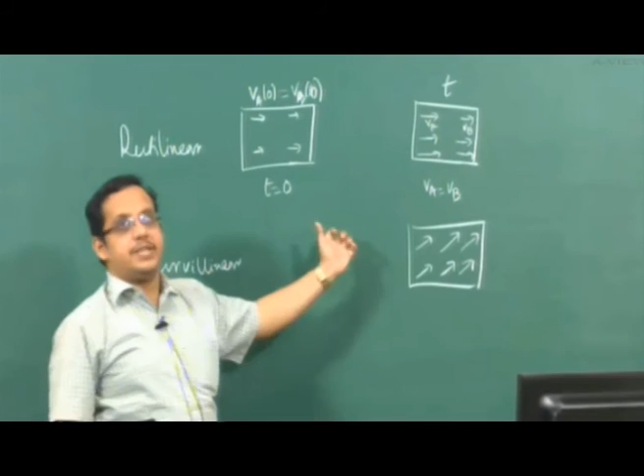And here you have, let us say, VA0 equals VB0. So there is no reason that VA0 has to be equal to VA, but VA has to be equal to VB. But the important thing about rectilinear motion is that even if the magnitude of velocity changes, the direction of velocity is the same. Whereas in curvilinear motion, at a later time, this same body could have velocity in some other direction. Okay, the direction of velocity need not be the same between two different time instants. Whereas in rectilinear motion, the direction of velocity, similarly the direction of acceleration, has to be the same for all time instants. I hope I have clarified myself.

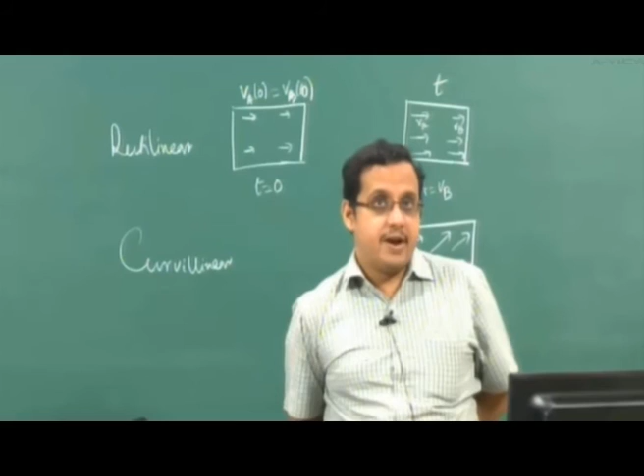Suppose it is a hill road. What is a hill road? It's a road that is ascending. Yes, then it will not remain planar. You need to describe it with three variables x, y, and z. The z variable describes the ascent, so it would not remain planar in such a case.

But as I am also saying, if you think that it's a spatial problem and therefore you require three variables to describe it, the other way of looking at it is that even then it could be taken as a curvilinear motion, in the sense that you could follow the path variable instead of looking at a coordinate system which has x, y, and z and trying to map x, y, and z with time. The driver could always say that I am traveling on this road, and on this road I have traveled a distance of 1 kilometer in 1 hour, 2 kilometers in 1.5 hours, 3 kilometers and such. So such a description in terms of path variable is also possible.

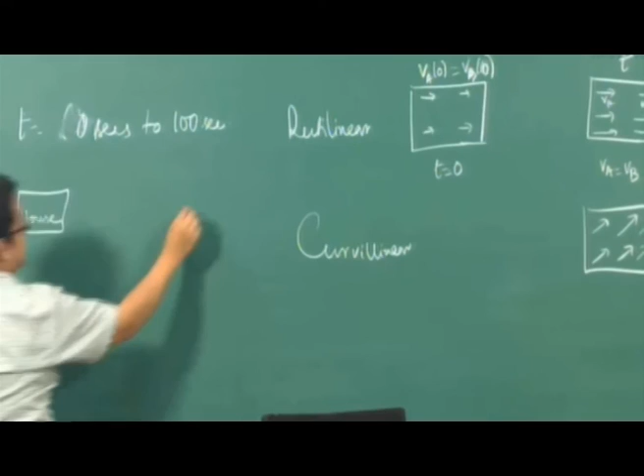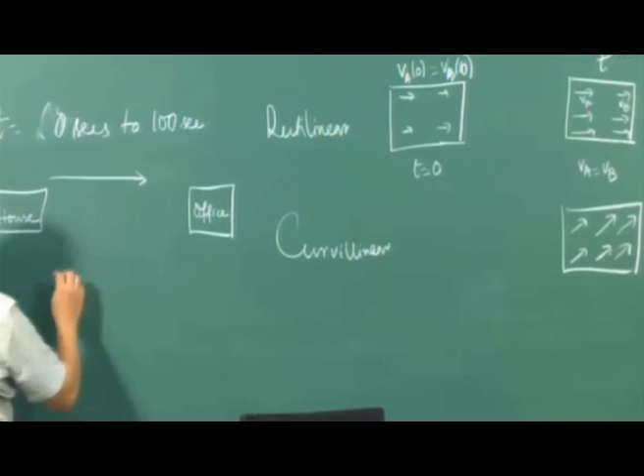So what I meant by piecewise representation is the following: you do not have a single functional description which describes, let's say, your period of analysis from time t equals 0 to 100 seconds. As I talked in my example, this is my house and this is my office. In the first 50 seconds I am going in the forward direction, let's say with 5t. I am going away from my house towards my office at x(t) equals 5t.

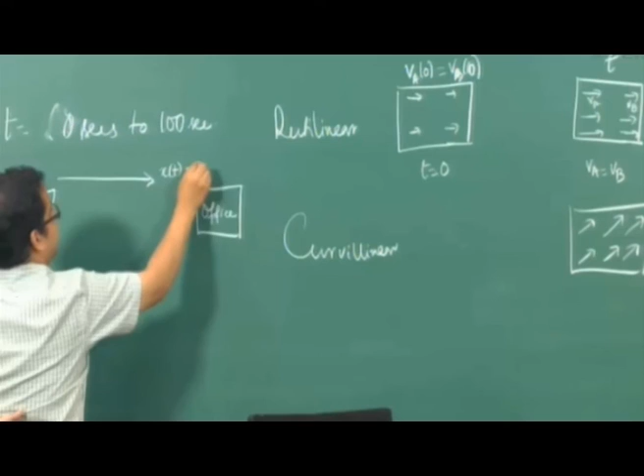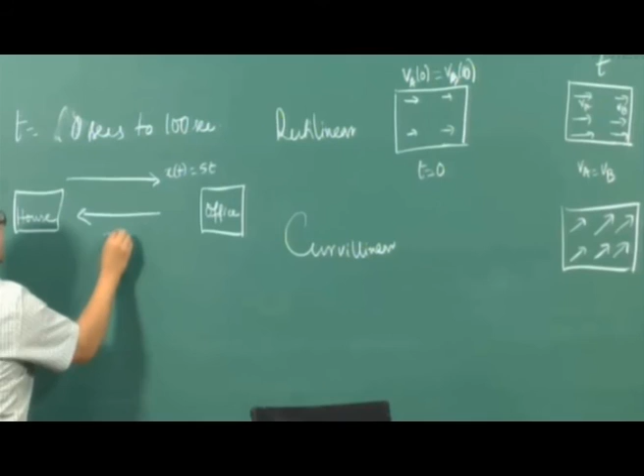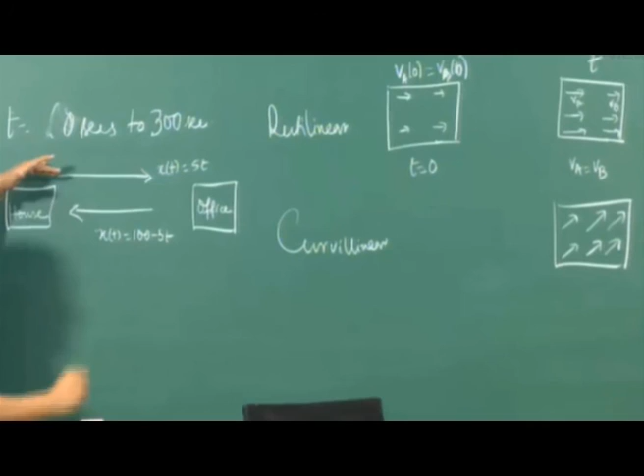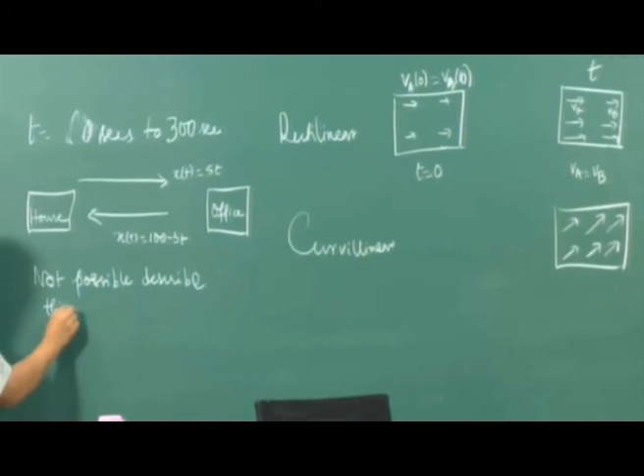But then I have actually reversed the direction of my motion. I have taken a U-turn and am coming back towards my house, and this time my function was x(t) equals 100 minus 5t. This was actually 300, I am sorry. So you cannot describe this kind of motion, where in the first part of the time you are moving away from your origin and in the next part you are moving towards the origin, by a single functional relationship. It is not possible to describe this motion using a single function.

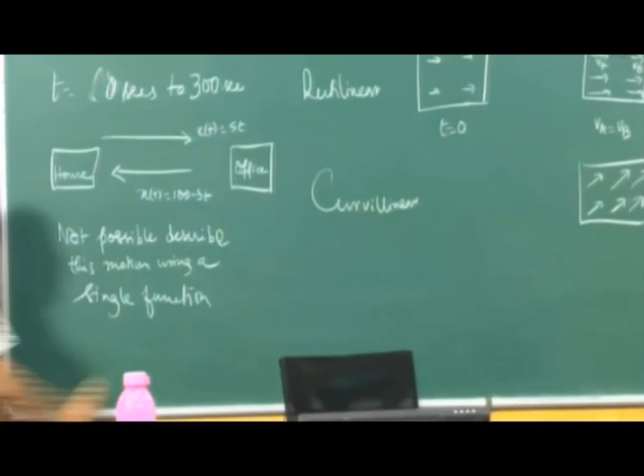So therefore, the best we can do is to describe this part of the motion with one function and this part of the motion with another function, which is what we have done, and that sort of representation is called piecewise representation. I hope that should be better for you.

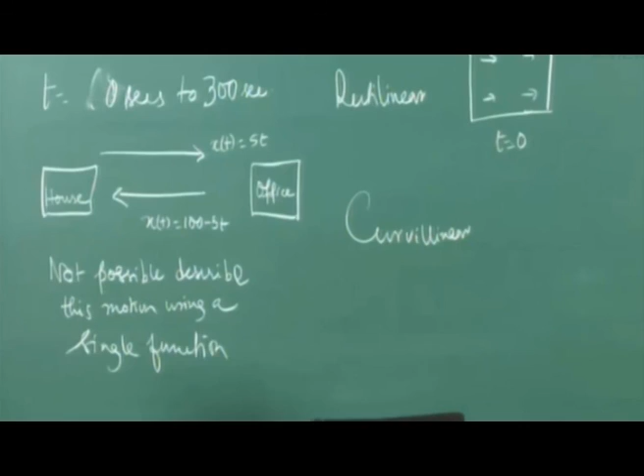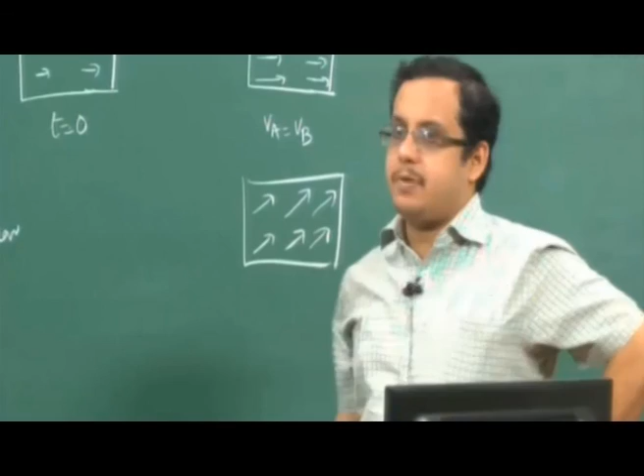What is the difference between curvilinear and rotary motion? TKM College, I believe, is asking me what is the difference between curvilinear and rotary motion. See, rotary motion is that which is applicable for bodies. If I have this kind of body, when it rotates in this fashion, this is a rotational motion of this body. But now this is not a particle anymore, because different points will have different velocities. Let's say I have a point here and a point here. These 2 points have different velocities as this object is rotating. So therefore, this is not a particle.

Curvilinear motion is applicable for particles, whereas rotational motion, rotary motion as you are calling it, is actually applicable for rigid bodies. So we are going to concentrate here only on particle kinematics, and therefore curvilinear motion is what we referred to in the context of particle kinematics, whereas the rotary motion that you are referring to is applicable for rigid bodies, wherein different particles will have different velocities.